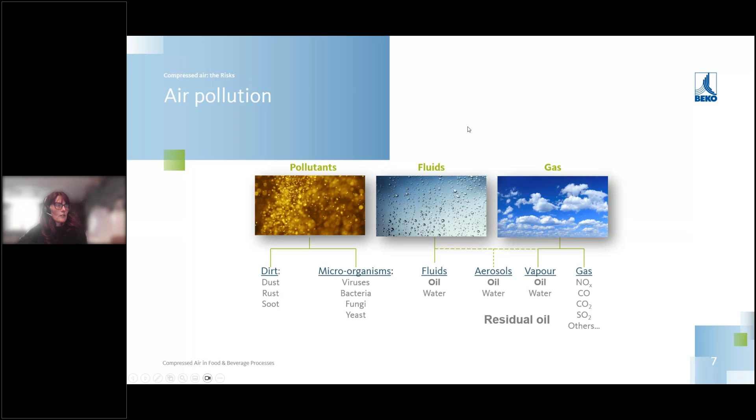So the film we have here just explains a little bit better what I just mentioned. If you take the air from a large space and compress it into a smaller space and then put it through pipework, that's basically what compressed air does. That's what a compressor does. It compresses, it reduces the volume, and pushes that airflow through a small pipe. So you can imagine that all the pollutants, moisture, oil, carbon dioxide, and any types of gases are also included in that compressed air stream.

Simply said, the quality of your environment air, the quality of the air on the intake side of the compressor, determines to a certain extent the quality of your compressed air. So it's a nice demonstration of what compressed air actually looks like in a simple diagram.

Before I was in compressed air, I never thought about it. It wasn't really interesting to me. I didn't know what a compressor looked like. And then when you see this image, you think, that's actually quite impressive. It's a great system, used everywhere. In most industries, there are very few that don't use compressed air. In some industries, it's less important for all these contaminants to be taken out, but in the food and beverage industry, it really is essential in an awful lot of processes. So just keep this image in mind when we think about what's in your pipework, in your compressed air.

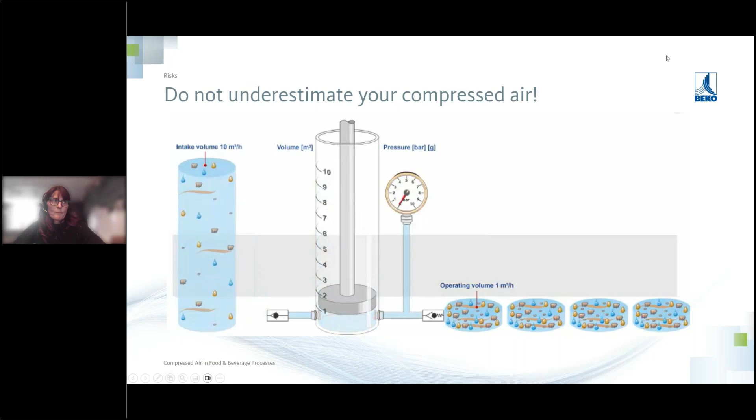Just think about that. So when we talk about the regulations and guidelines, if we're talking about dirt, moisture, filth, oil, who tells us or informs us what type of quality of air we're supposed to have? Who guides us and says you are only allowed to have a certain limit of moisture, a certain limit of microorganisms, oil, and dust particles?

There are a lot of certification companies out there, and in general, very little is said about compressed air. This is one of the things BEKO Technologies is working on, bringing awareness to not only these certification authorities, but places like Nemes Academy, where we can share our knowledge and think, hey, we need to share what we have, because the more we know, the better we can deal with things. The more we know, the more we measure, the better we can produce food products.

So the three particular ones I'll be talking about today are just three examples of where compressed air is mentioned, and that will be the BRC, the Food Safety System Certification (FSSC), and the IFS.

So what does the BRC say? I was just talking to Stefania just before this webinar started, and we were saying how little is actually mentioned about compressed air in all the certification programs. And I said, yes, it's true. There's only one item in the BRCGS, item 4.5.3, and all it says is: air and other gases used as an ingredient or that are in direct contact with products shall be monitored to ensure this does not represent a contamination risk.

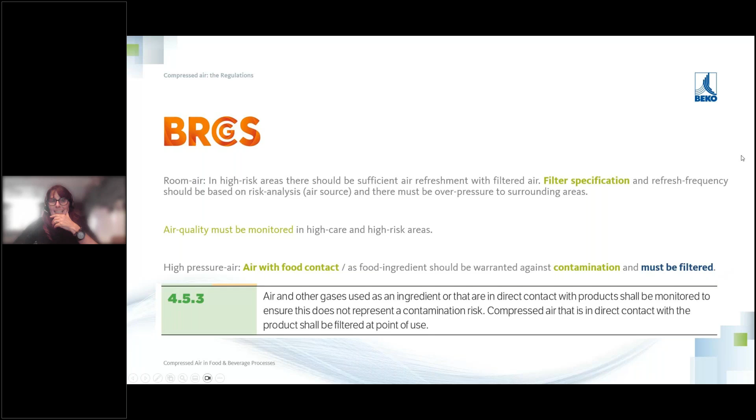And that actually comes a lot into the other certification programs that we talk about, the IFS. This is almost the exact same thing. The quality of compressed air that comes into direct contact with food or primary packaging material shall be monitored based on hazard analysis and assessment of associated risks. Compressed air shall not pose a risk of contamination. Again, very similar to the BRC, very similar in wording. Basically, compressed air should not form any risk of contamination and needs to be monitored.

Now, I don't know what monitoring means to you guys. Somebody might think, hey, I have a little person watching my compressed air installation all the time with his binoculars, with his glasses. He just sits down and watches the compressed air all day. He's monitoring the compressed air. It could be you have the high-tech measurement equipment, meaning that any type of variation or deviation in quality, you get an alarm bell on your fancy computers on your big screen. Monitoring is so broad, it's so open to interpretation.

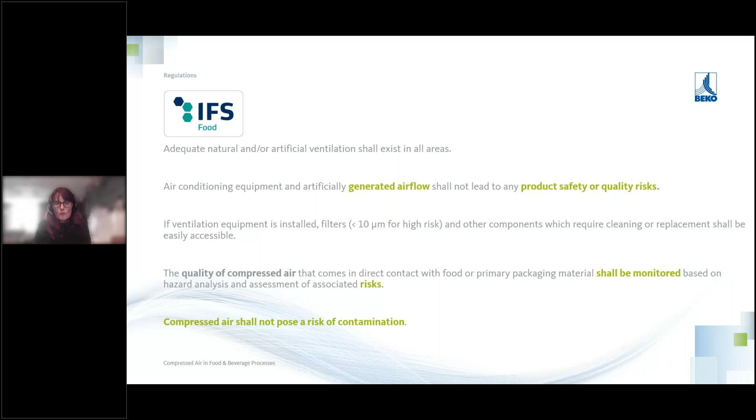So again, what does that mean for us? What does the FSSC say about it? Pretty much the same. Any compressed air used shall be constructed to prevent contamination, direct or incidental, of product, including transporting, blowing, or drying, shall be approved for food contact use, filtered to remove dust, oil, and water. So the FSSC actually uses similar words, but goes a little bit further, because the last sentence here says where oil is used for compressors, and there is a potential for the air to come into contact with the product, the oil used shall be food grade.

I'm just leaving a bit of silence there, because when I spoke last time on a webinar and I said, who here has ever got a jar of food grade oil from the compressor room and said, I think I'll have a drink? Nobody. So if that food grade oil in that jar is not an ideal drink for you to take on a Friday afternoon after you've had a hard day's work, why on earth would you think it's acceptable to spray, pour, or use it in your food product? It has less additives than mineral oils, but it still is oil that should not be used when a product comes into direct contact.

So yes, food grade oil can be better. It has lots of other factors as well. It doesn't clean the air as well as normal mineral oil does, because there are less additives. So oil is not only used for lubrication, but it's also used as a kind of filter. It takes out certain contaminants, certain particles from the compressed air stream. But food grade oil has less additives, so it has less of an absorbing capability for the contamination in compressed air. So food grade oil also, because there's less additives, doesn't last as long, so you need to replace it more often. It can be a bit of a degradation for your compressor, because it has to be changed more often, because it's less lubricating.

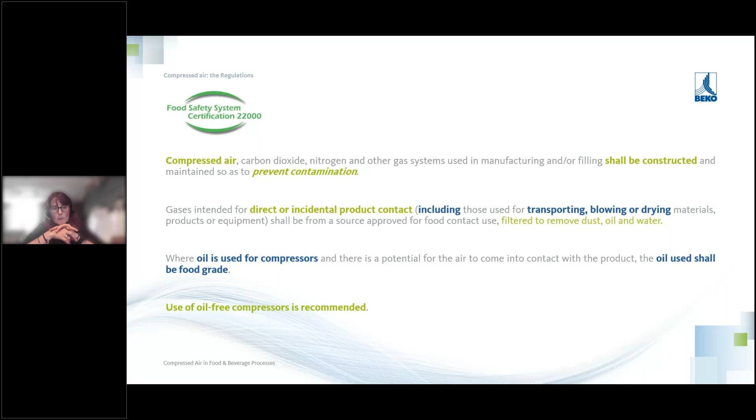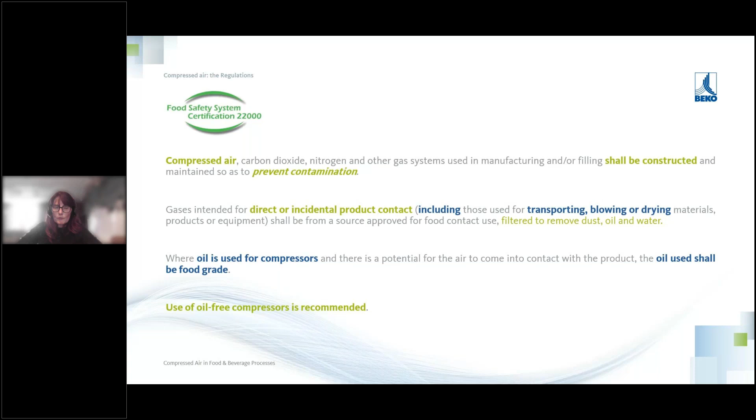So the three certification programs I've chosen, the BRC, the IFS, and the FSSC, all say pretty much the same: it shall be monitored, shall be filtered as close as possible to the point of use, and prevent contamination. The FSSC goes one step further and says food grade oil or an oil-free compressor. Just think about the limitations of those last two comments when you next go to the compressor room. So they all say it should be monitored, should be filtered, and may not pose the risk of contamination.

So the definitions: okay, so those vague guidelines that we have, how do we use those guidelines to define hard numbers that we can actually measure in order to classify our compressed air quality? Because if you look at your compressed air installation and it says it poses no risk of contamination, it's kind of guesswork, because you can't measure it or you haven't measured it.

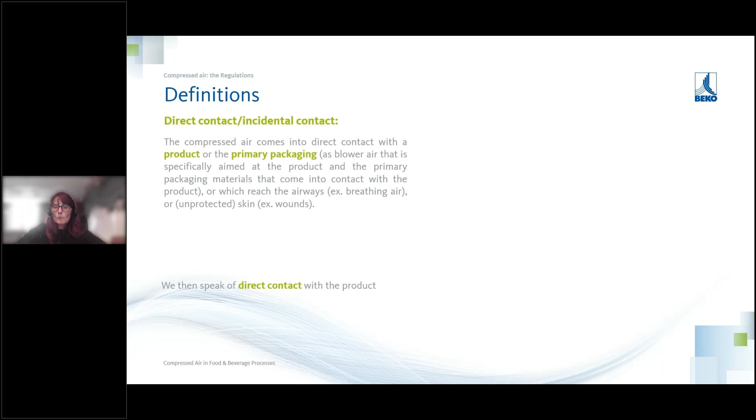It means that you've got to consider all the aspects within the process. So compressed air needs to be clean in order to preserve the shelf life, in order to keep the product safe for as long as possible without all the extra additives.

So there's less risk because the dilution means it's not as much of an impact with contact with the product. We talk about indirect contact with the product, and usually that comes from pneumatic components such as moving parts, vessels, cylinders, and that kind of thing.

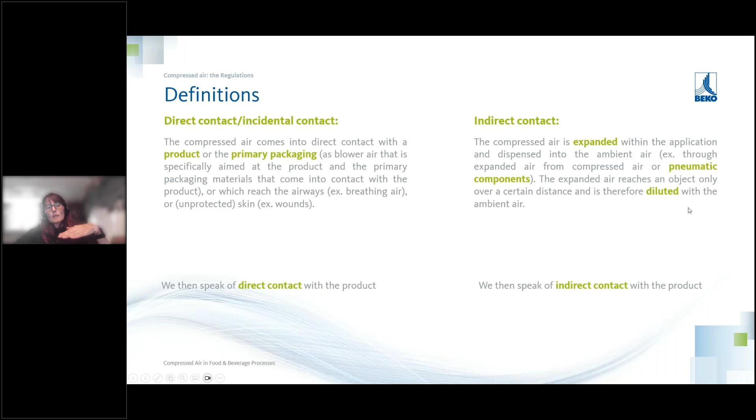So we have two definitions here: direct contact and indirect contact, and we need to determine in a particular process where my compressed air has direct contact with the product, and what quality that needs to be to ensure my product is kept safe.

Talking about numbers now, because I have a film in a couple of slides showing one piece of equipment that has direct contact and indirect contact. The VDMA has not only defined direct and indirect contact, they've also defined levels of contamination that are acceptable in order to put the quality of the compressed air into a class.

What is an acceptable level? You have different sized particles. I'll compare it with a football, a tennis ball, and a golf ball—just for visualization, since obviously we don't have footballs in compressed air. Just to make it more visible: football-sized particles, tennis ball-sized particles, and golf ball-sized particles. Different sizes mean different levels.

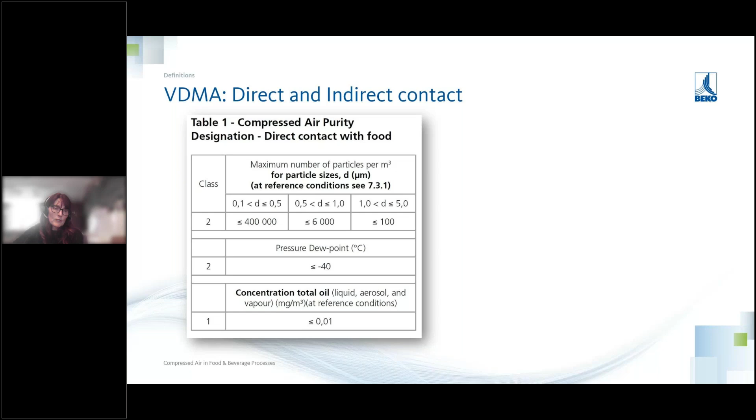If you're going to look for direct contact with your food product, then we advise class 221. When you talk about indirect contact, then you talk about slightly different classes. So the moisture is the thing that changes and the oil content changes. So the particle sizes don't change that much, they're pretty much still in the same class.

But the dew point for indirect contact, where we mentioned just before, that was with moving parts, that's with vessels, that's with cylinders that move back and forth. The pressure dew point does not need to be as low as minus 40. A pressure dew point can be plus 3, because in a working environment where cylinders are moving back and forth, usually the temperature stays at about that temperature. It very rarely drops underneath 3 degrees, meaning that the moisture in the compressed air will stay moist and will not condensate until the temperature decreases.

And especially for moving parts, oil is also sometimes a little bit okay to have, to provide a bit of lubrication so that the cylinder can continue moving. So direct contact and indirect contact are slightly different.

Again, it depends on your specifications as a producer. It depends on what the manufacturer actually needs for his process. But this is the guideline that is now being translated. So guidelines from 'must be monitored', 'shall be filtered', and 'must not form any risk of contamination' - we can translate them into these numbers, and that's something that is measurable.

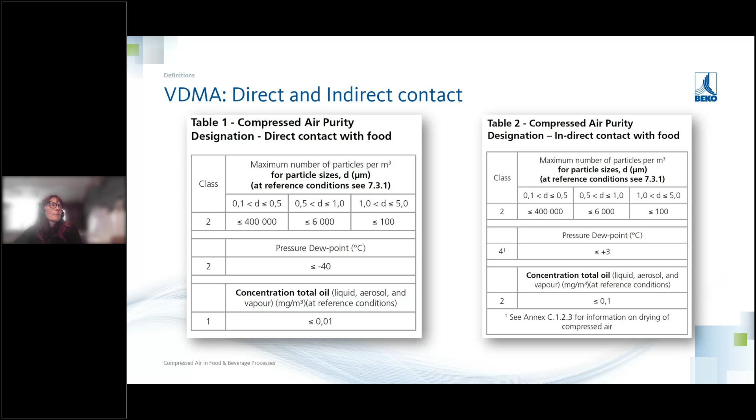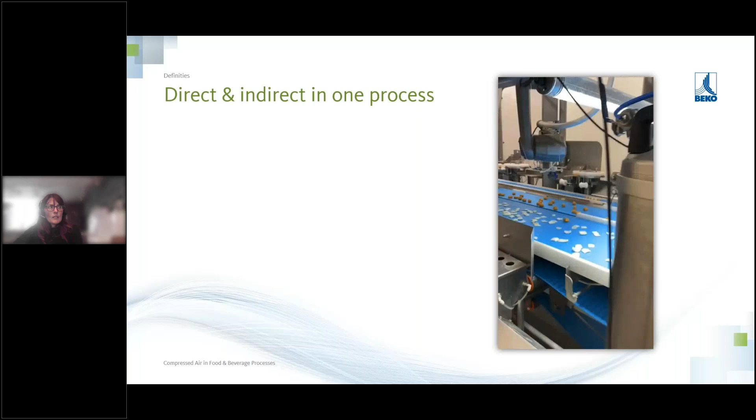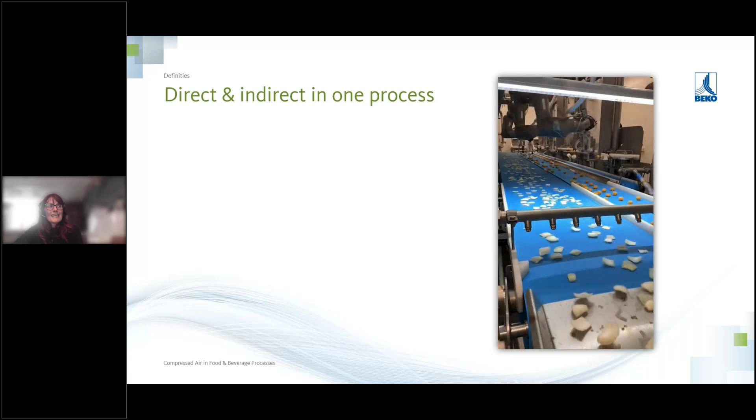So here's an example in this film of a piece of equipment, one machine, which is making cookies, and they have different processes within one machine. Now you can see here nozzles blowing compressed air over the product, separating them, splitting them, dividing them - that's direct contact. And here you see moving parts, cylinders, all the blue cables - it's usually compressed air. Sometimes companies have a different color, but usually a blue cable indicates a compressed air line. When you look at the robot arms moving, compressed air is being used to move cylinders, to create movement. And when compressed air is inside a cylinder, it escapes, so you have indirect contact.

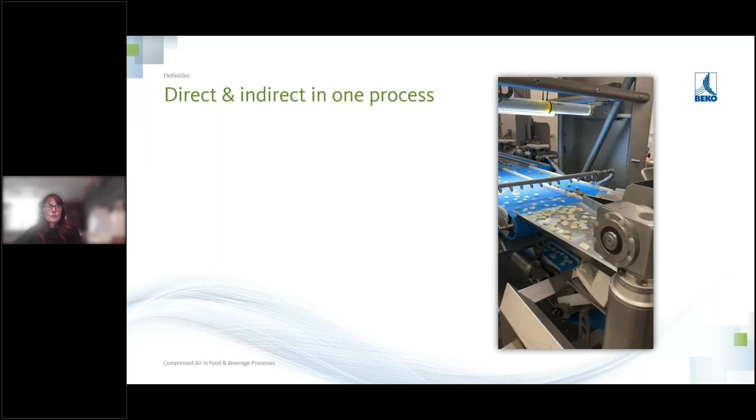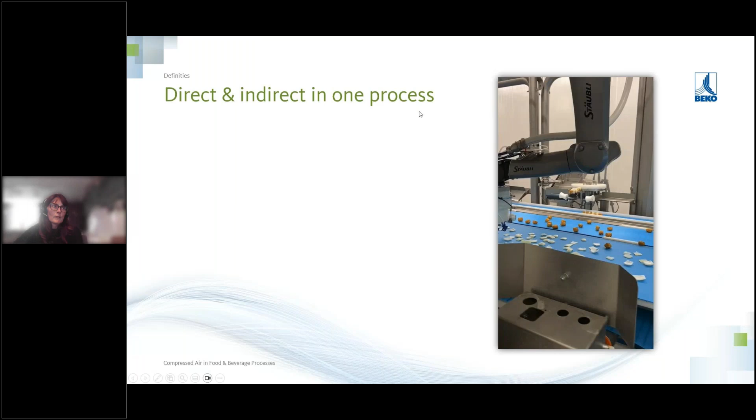So when we talk about, for this piece of equipment in particular, the quality that we would like to have would have to be the highest because that's where the most risk is. If we accepted a 242 class, meaning there's still moisture in there, this compressed air nozzle would be blowing moist air over these dry cookies. And these dry cookies would pretty much like to take on some moisture and become soggy cookies. And nobody likes a soggy cookie. Unless you dunk it in your tea like I do.

So just to get a bit of a close-up here, the nozzles on the left-hand side of the screen, they blow compressed air directly into, onto, or through a product. Sometimes compressed air nozzles are used to clean molds where you put melted chocolate. Sometimes it's used to clean a transporting rack. Sometimes compressed air is actually used to blow away products that are not according to specification. So you have 20 nuts and one of them is the wrong size, wrong shape, wrong color - compressed air is sent through the system and it blows out that one nut or peanut that is not up to specification. So it's direct contact with the product, usually where you can see a nozzle blowing directly onto the food product.

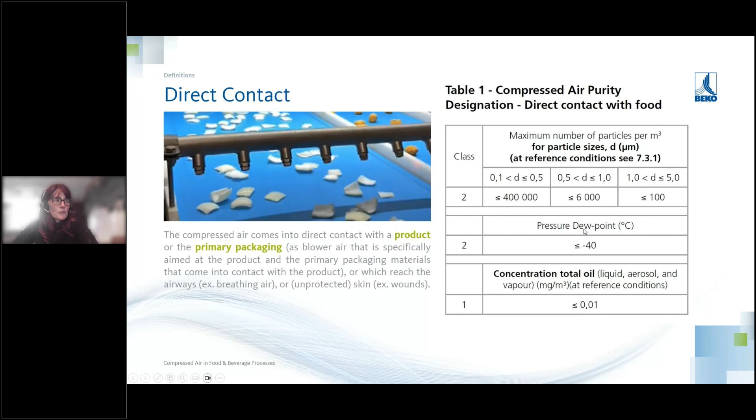So again, bringing the table back into view here, the quality class that we would like to see for this particular part of the process would be quality class 221. Particles, class 2, moisture, class 2, and oil concentration, class 1.

When we go to the next picture, it's indirect contact - the robot arms. You can see here the pipe work from the compressed air. This is indirect contact, so the compressed air will escape from the cylinders. You sometimes hear the movement, which means compressed air is escaping and being diluted into the environment. So the scheme next to it, the sheet, is class 242 for indirect contact.

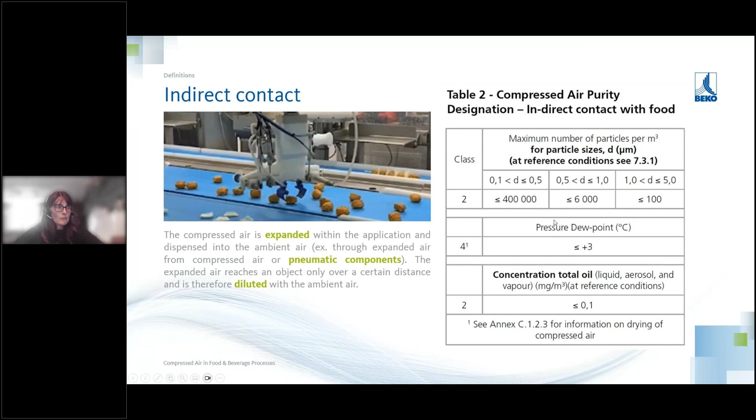So when we look at it as an overview, just to give you an idea of the actual ISO 8573 class, this is what it looks like. It's something that has been developed by the British Compressed Air Society and ISO together, purely to give some definitions to direct contact and indirect contact.

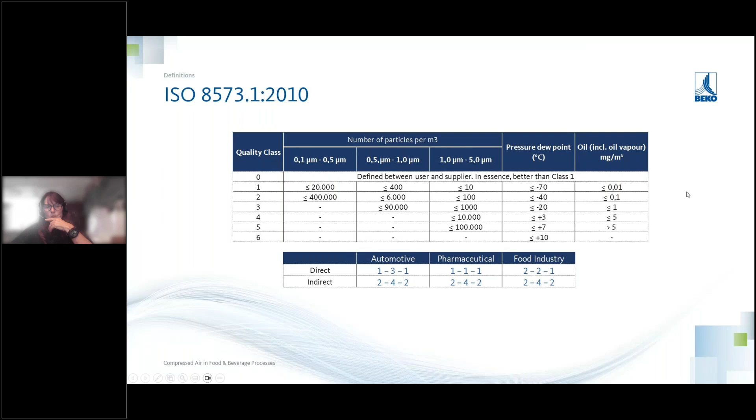So when we look at this overview here, for direct contact we had class 221. You can see with the green line around here, the first three columns are the particle size - the football, the tennis ball, the golf ball, the three sizes. The fourth column, the pressure dew point, that's the -40, also class 2. And then class 1 for oil vapor is class 1, 0.01.

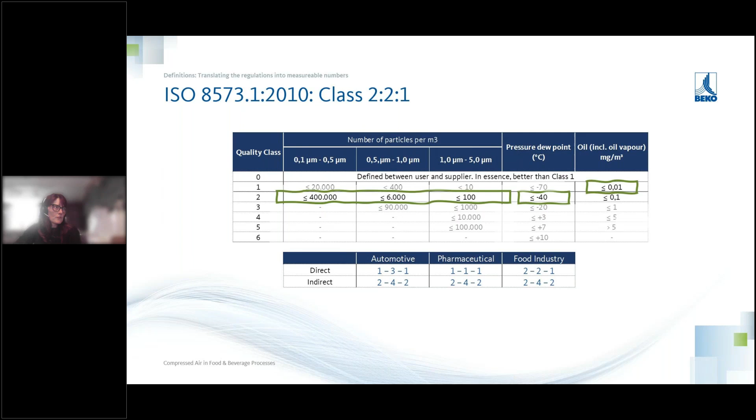Just underneath, a bit of an indication as to the requirements in different industries. The automotive industry for paintwork - oil and moisture is really not done for paintwork. You will get an awful effect, like peeling, bubbles in the paintwork. Costs a lot of money to redo a car spray paint.

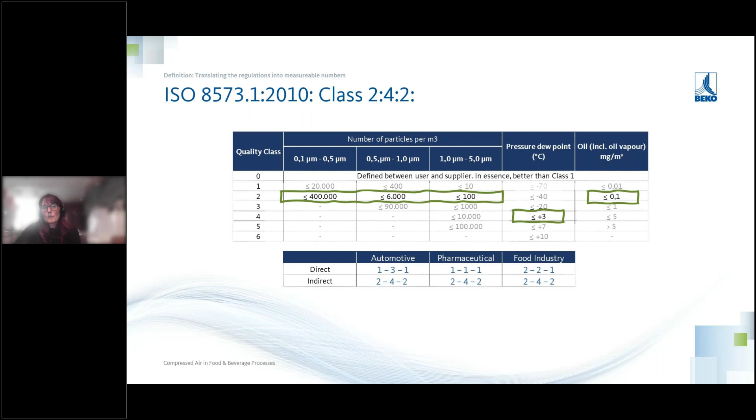Pharmaceutical industry has to have class 111. They really are very secure in anything that uses compressed air - they monitor and measure it so much better. And the food industry, 221. Again, it will depend on the product we're talking about. If it's a product that takes on moisture, if it's hygroscopic, it will absorb moisture - not a good thing. If it doesn't absorb moisture, then moisture will be less of a problem. So again, it depends on every product. But these guidelines do help create a bit of awareness on where we're going to go with this.

So when we look at the process, it's not just the manufacture of the product. Here we're looking at the end product - the meat, the cheese, the bread, the ice cream, or the milk - and we're looking at the process here in the machine. You see a CCP, a critical control point or a control point, depending on the process - it might not be a critical control point. What happens from the start is this is the intake air on the left-hand side. You see moisture, trees, cars, exhaust, industrial air. Anything in the air gets taken into the compressor.

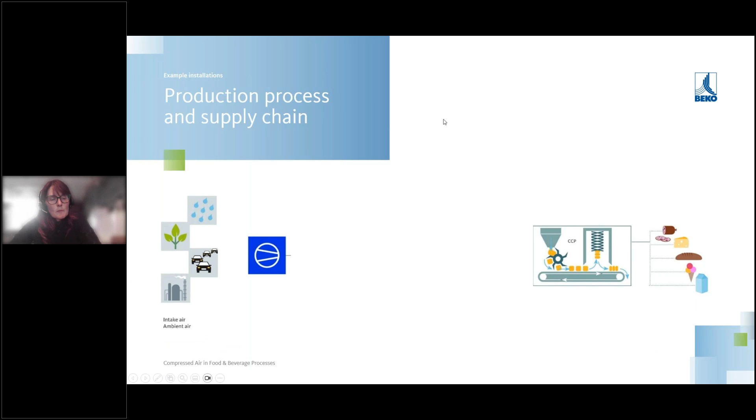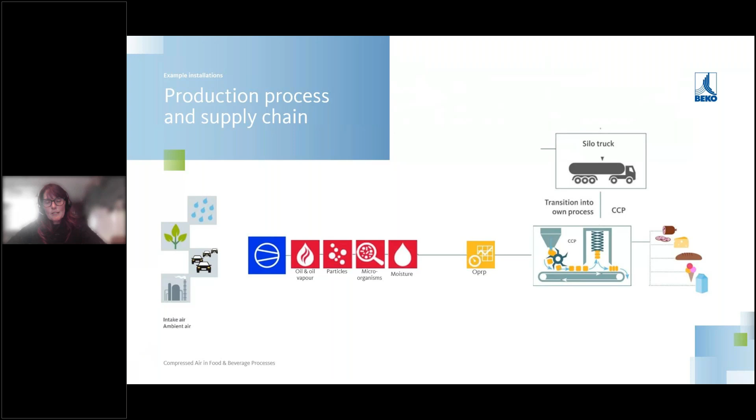The compressor then makes it into a smaller bundle of mass, and then the oil, the particles, the microorganisms, moisture are all collected together. And just before it reaches the CCP, just before it reaches the manufacturing part of the product where it comes into direct contact, is something that needs to be taken into consideration. So the OPRP, the operational prerequisite program, it's something that needs to be mentioned when you talk compressed air - it needs to be mentioned because it can be a risk. So take into consideration that it might not be a huge risk, it might not be a critical risk, but it's something that is part of the production process.

Now, providing the manufacture of the bakery or the breads, whatever, you have a silo truck - a truck that's transporting sugar, milk, powders, whatever. What happens with the transport that he is bringing, the raw materials and the packaging? How did it all get into the truck? There's obviously a compressor there because in the silo truck, you need to have some compressed air pumped in to get the powder out of the silo truck. So think about that in the production chain.

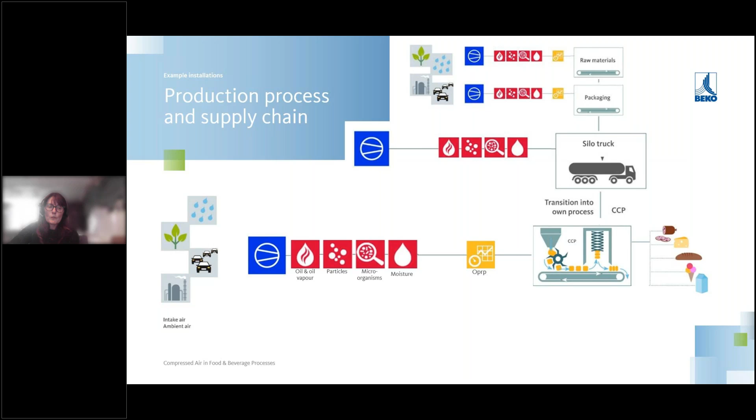Does the manufacturer know how his suppliers use compressed air? Do they monitor the compressed air as well? Because that can still have an impact on his product, whether he has it all beautifully written into his OPRP, but maybe his supplier, maybe his transporter doesn't. So it's something he needs to address and say, hey, I need you to look at the compressed air and provide me with proof that you are monitoring it, that you're keeping the values as low as possible, because I need to keep my product safe.

Now I'll just go through these installations briefly because we have about another 10 minutes. I don't want to go into the installations too much. A typical installation, you find a gray compressor, blue compressor, yellow compressor, it doesn't matter. It's an oil lubricated compressor. You see a vessel where the air is stored. Now, if the vessel does not have an automatic drain under it, moisture can build up inside the vessel.

And that ends up as a nice foundation for microorganisms for growth. A nice warm environment, a lot of moisture, and that can also be transferred through to the filter, which is number 3, and then through to a fridge dryer. Now, the fridge dryer provides a dew point of 3 degrees, which means for indirect contact, this can be a perfectly suitable solution.

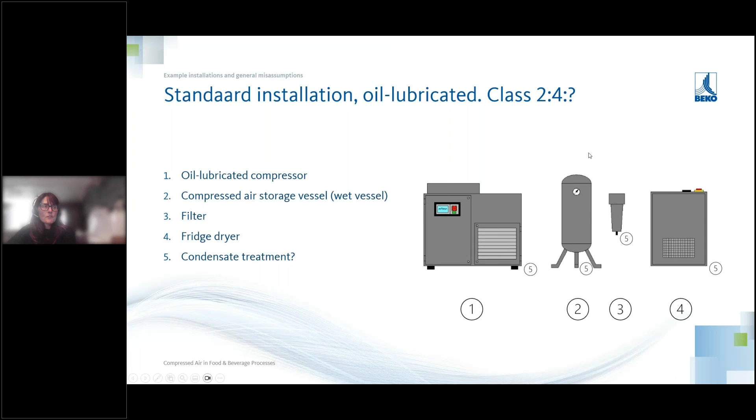The first thing we need to take into consideration is where are the drains to remove all the moisture from the compressed air. And that's something every compressor has inside, but it's not always an automatic drain. It's not always a drain that drains when there is moisture. Sometimes it's a time valve, sometimes it's a manual valve just to release water. So a standard installation for a class 2:4, possibly, potentially.

What's the condensate treatment look like? Another installation similar, but slightly different in installments. So you have the compressor, the filter, the dryer, and then the vessel. And the vessel is then what we call a dry vessel. So the moisture has been removed by the fridge dryer, number 3, and now there's dry air inside the vessel. Again, moisture can still happen if the temperature reduces underneath the temperature that the compressed air has been dried to, which is the fridge dryer, 3 degrees.

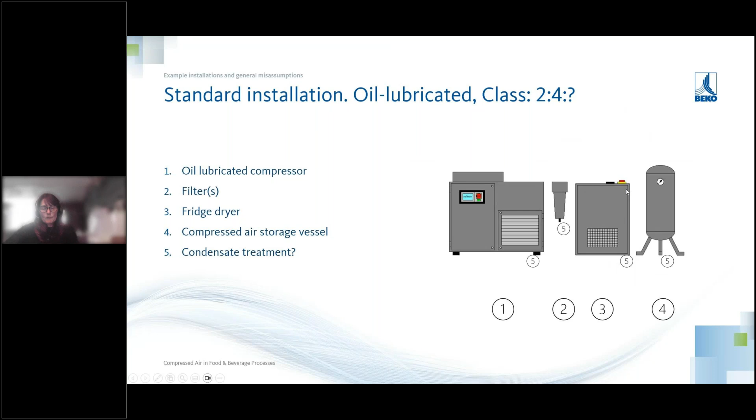If your fridge dryer doesn't work, then you can end up with 5, 6, 7, maybe even 12 degrees. And the moisture in compressed air increases exponentially. So with 3 degree compressed air, you have 6 grams of water per cube. When you go up to 25, 30, with 35 degrees, you have 39.95 grams. So it's an exponential increase. The warmer the air, the more water it can contain.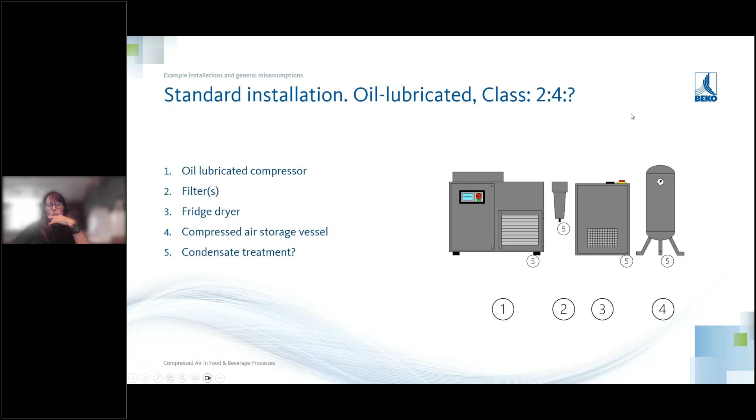So again, moisture is always going to be the first thing you can look at. That's the first initial treatment you can give your compressed air installation: a condensate drain that removes the condensate, the actual fluid water, from the system, but without loss of compressed air, because compressed air is an expensive medium. And if we lose compressed air, we're basically just burning our money.

So the next installation is a similar one. It could be an oil-free compressor. So you have here an oil-free compressor. And as I mentioned previously, oil kind of washes the air, so it takes up certain contaminants. But you still need to have a class 1:2:1. You still need to have treatment because intake air can contain hydrocarbons.

For the water-injected compressors that I mentioned previously, the water quality also determines the quality. If that water is, for example, a stupid example, if it's sucked from the river to cool the compressor, you're going to have the river water quality. Now, that's never going to happen, but it's just to give you an example. What is the quality of the water used for cooling and used for keeping the system closed so there's no backwash of air?

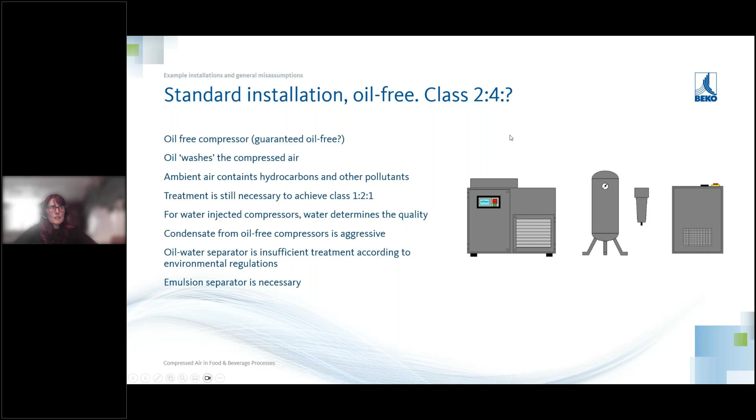And you need to think about what happens to the condensate that comes from an oil-free compressor. The condensate there is generally quite aggressive and cannot just be removed by an oil-water separator. So that's something I can always go into more detail on, but right now it's not the big issue because that's treatment after the condensate has been removed, and we're talking more about the actual compressed air and not so much the condensate from the compressed air.

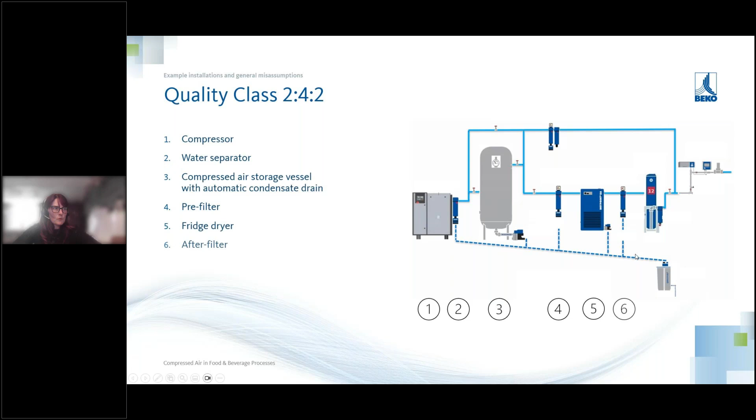Another installation example, because obviously that's what we like to do. We'll have a compressor with a water separator, and you can see the blue dotted lines. The blue dotted lines show where condensate can happen and where it's removed and then is treated by an oil water separator.

So once you've removed all the moisture from the system, you have less moisture in your compressed air. So we go from the compressor to the water separator, to the vessel, to a pre-filter, to a fridge dryer, to an after filter, and then to an activated carbon. Activated carbon is used regularly to remove hydrocarbons from compressed air streams, so oil removal, and afterwards a measurement system just to prove the quality of the compressed air. Simple installation, often used with activated carbon.

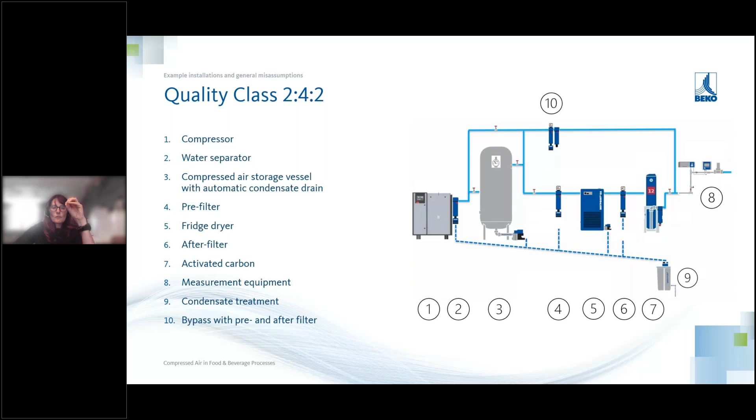Now, activated carbon has also its limitations because activated carbon captures oil and oil vapor. But if there's moisture in the compressed air, it will also take in moisture, so then there'll be less capacity to take in the oil. So you'll still end up with oil after your activated carbon. Another limitation of activated carbon is temperature. If there's an increase in temperature, the captured oil can then evaporate and still travel through the stream. So activated carbon, even though it's often used to remove oil and oil vapor from a system, has its limitations. You have to be aware that moisture and heat have an impact on how it will capture the oil in a compressed air treatment.

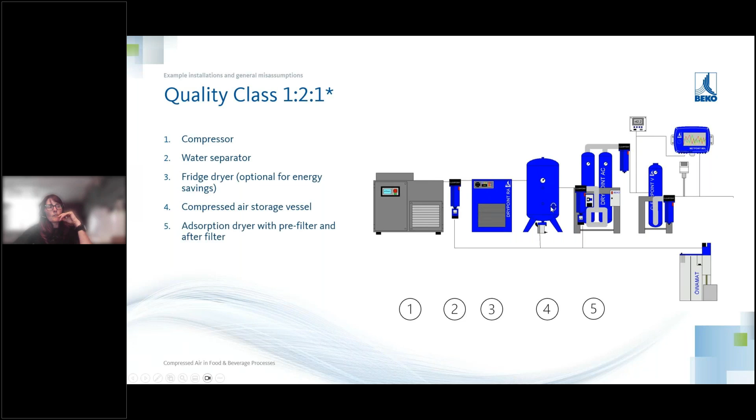Ideally, if I'm right, this is the correct picture. Quality class 1, 2, 1. We have a compressor, we have a water separator, we have a fridge dryer, and then a vessel. Then we have an absorption dryer with - I'm trying to think of the English word again, I apologize - with beads inside that capture water and then release it again. So it's an adsorption dryer, not an absorption, it's adsorption.

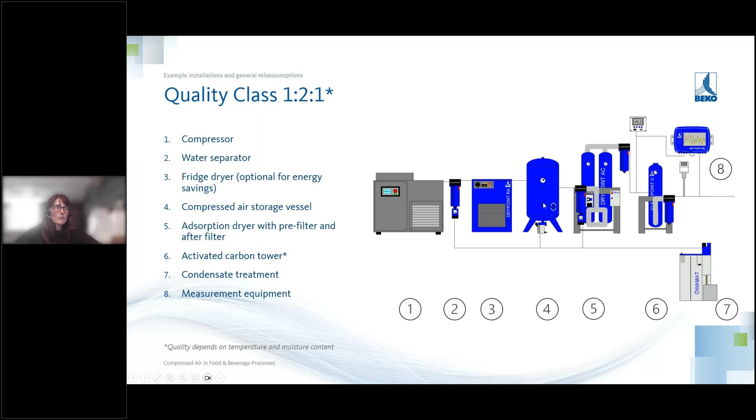It removes moisture from the compressed air in one vessel while the second vessel is then being regenerated. So it kind of switches towers, it switches columns to dry and regenerate the compressed air. It takes in moisture and then gives the moisture back out and removes it from the compressed air stream. Then we have a small activated carbon tower, just again to remove oil vapor, and then measurement technology afterwards. And the black lines coming down from every piece of equipment underneath the first separator, underneath the vessel, that is oil condensate, which is then treated by an oil water separator.

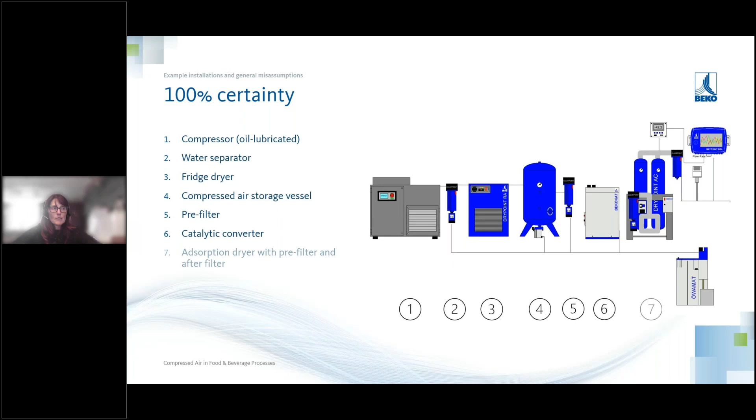The activated carbon is, again, I did mention, limited in its use. If you want to be absolutely 100% sure of oil-free and bacteria-free compressed air, the only way to go is a catalytic converter. A catalytic converter uses a catalytic material in combination with heat to break down the hydrocarbon chains into CO2 and H2O, and that's the certified method to remove oil and bacteria from a compressed air stream.

So: compressor, water separator, fridge dryer, storage vessel, pre-filter, catalytic converter, adsorption dryer, because as I just mentioned, the BEKOKAT breaks down the hydrocarbon chain into water and CO2. So with a dryer afterwards, we remove the extra moisture from the compressed air stream. Then we have a dust filter and measurement technology again.

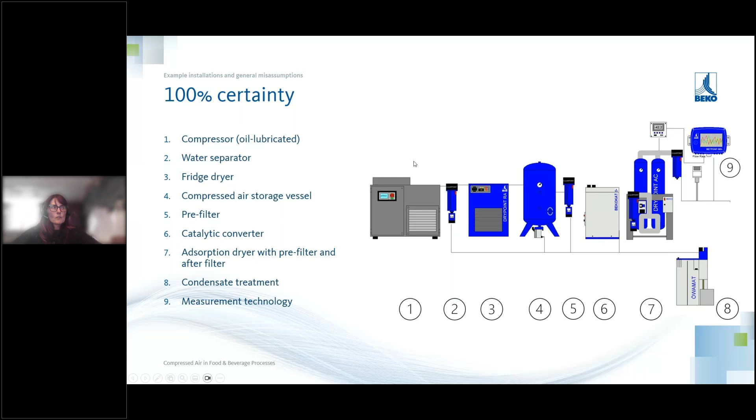And this measurement technology is basically what we think you can use to monitor your compressed air professionally, exactly and efficiently. Because if you don't measure the quality of your compressed air and you don't know what the quality is, you're basically looking into a crystal ball. If you've never had any problems, you've always done it this way, nobody's ever complained, you've never had anybody sick - yes, we can all say that when we don't know what we're looking at.

So you have to think about measuring and monitoring to meet the guidelines. We measure everything these days. We measure the pressure in our tires. We measure the petrol in our tank. We measure the electricity that we use. We measure the water that we use. We measure every step we take just to see if we're getting our steps in every day.

But with compressed air, we kind of think, hey, I have a good installation, it's fine. It's maintained every year, it's fine. But if you're not measuring it, you really don't know. Sometimes you're quite surprised - the technical specifications can say they give you the quality you need on paper, but when you actually measure, it turns into something different, something you weren't quite expecting. And the whole time you've been thinking, I have a great installation, it's well maintained, it's brand new, but I still have the wrong quality at the end of the pipe work. How did that happen?

It's possible, I've seen it happen. And it's surprising that it happens all the time, because pipe work has a big impact on it.

So the compressed air treatment we have to take into consideration: look at the compressor room. Where is the intake air? Where is the compressor sucking air from? Is it a chemical area, a rural area, the middle of the countryside, or the middle of an industrial estate? What air are you taking into the compressor room, meaning what air is the compressor sucking in?

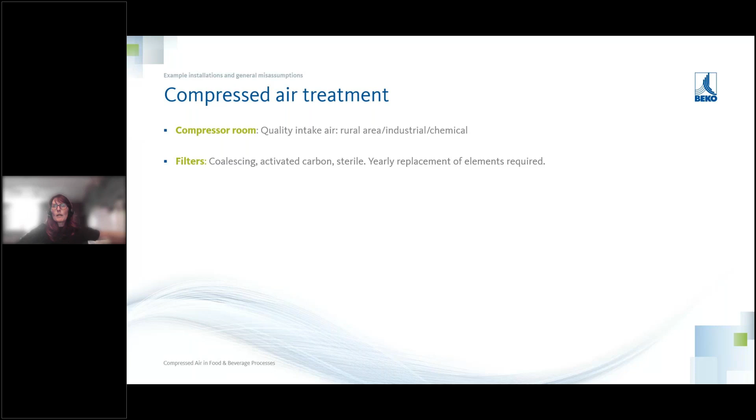You need to replace these elements at least once a year, and sometimes more often. Think about that, it's not just yearly. If I drive my car 1,000 kilometers every day, it's going to need more maintenance than somebody whose car is just left there for three weeks doing nothing. So it's use, it's the location, it's what is the intake air.

What type of dryer do you have? We only briefly talked about a fridge dryer and an adsorption dryer. There are different types of dryers which give different quality class requirements. Do you have the right type of dryer? If you do, is it functioning correctly? Does it need maintenance, does it need regular replacement?

Does it need maintenance done yearly, monthly, weekly? People tend to think once a year is fine, but maybe twice a year might be better, just to keep the quality class at the same level as it's always been and what's required.

Condensate treatment - what type of condensate drain do you have? Is it an automatic drain that is level controlled? Is it a manual drain, which is basically just a tap underneath a vessel? And if you forget to open that tap, you'll have a vessel flooded with water instead of compressed air. You won't have enough air for your installation, and you'll just have a lot of moisture there.

So you open the tap and buckets and buckets of water can flood out. I had that one time with a customer - he had a vessel and said, I don't seem to have as much air available. I said, check your vessel. He opened the tap underneath, and twelve buckets of water later, he said, I think it's empty now. So yeah, it's a little thing, and it was amusing.

But when you think about the waste that is, if you just put a simple automatic, level-controlled condensate drain, it is so much more efficient and effective. What do you do with the condensate once you've removed it? Do you use an oil water separator? Do you have your own water treatment system? Or do you need something specific to make sure it meets environmental regulations?

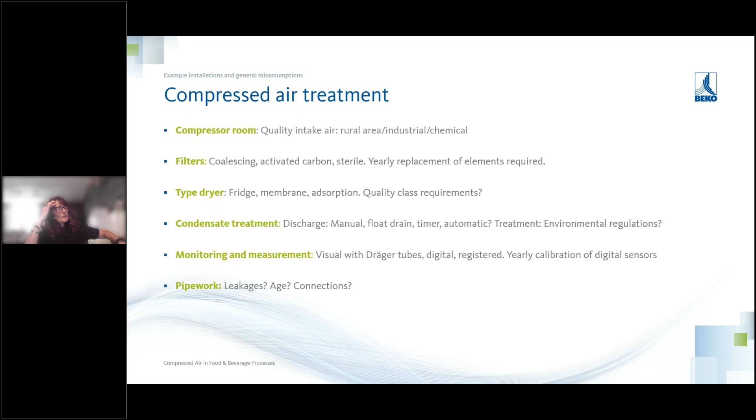Pipe work - oh, I have so many customers who I ask, have you checked for leakages in your pipe work? Good grief, don't get me started. I would not even like to think about measuring the leakages in my pipe work.

Some customers actually install a second compressor just to compensate for leakages in the pipework. That's such a waste of time, such an energy loss, because energy costs money and we're trying to reduce energy. So when your compressor is running extra hours to compensate for leakages, you're also creating CO2.

It's a simple thing, yes, an awful thing to have to do, checking your pipework for leakages, checking for ball valves which are oil lubricated when you're supposed to have an oil-free system. If a connection isn't connected correctly, there's so much in the pipework that can improve the quality of your compressor, believe me.

And what certifications do you follow? We've shown the three: the BRC, the IFS, and the FSSC. How do you prove to the auditor, who is becoming more and more aware of compressors because we're training them to look at the compressor installation? Do they accept you saying my system was installed 5 years ago and I've had it maintained every year? Do they accept that the technical specifications are the actual specifications? Do you have a high quality compressor class according to the requirements for your product?

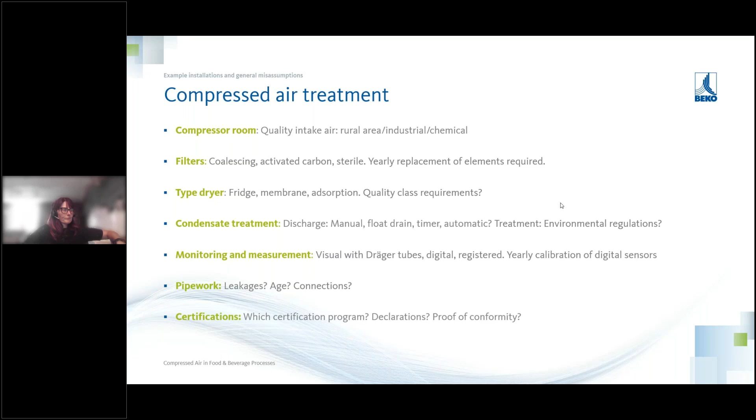So starting from, where do you start? If you look at your compressor installation, the compressor, the filters and the dryers, and you think, I don't know what quality I have according to the specifications the manufacturer tells me, I have class 2:4:2. I have a good quality class suitable for my product.

Check it. Do an air quality audit. Get some digital measurement in. Measure the moisture, the particles, and the oil, and then you have a benchmark. Then you have a starting point from which you can improve if necessary.

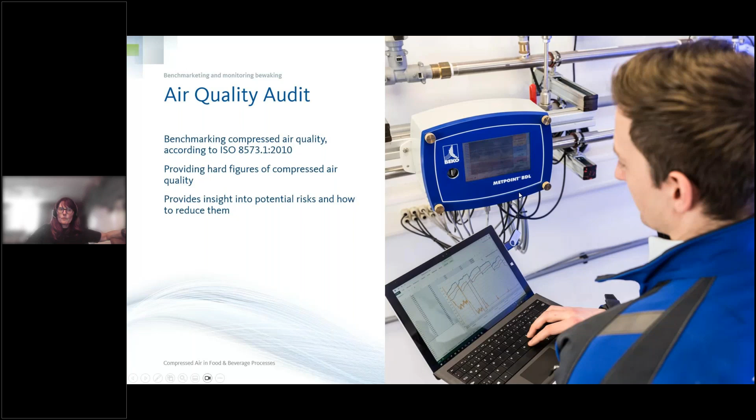So it provides insight into the risks you may have. If you have a fridge dryer that's not working, you have a lot of moisture you did not know about, and you need to improve on it. It's basically your starting point. Where do you go from there with improving your compressor system?

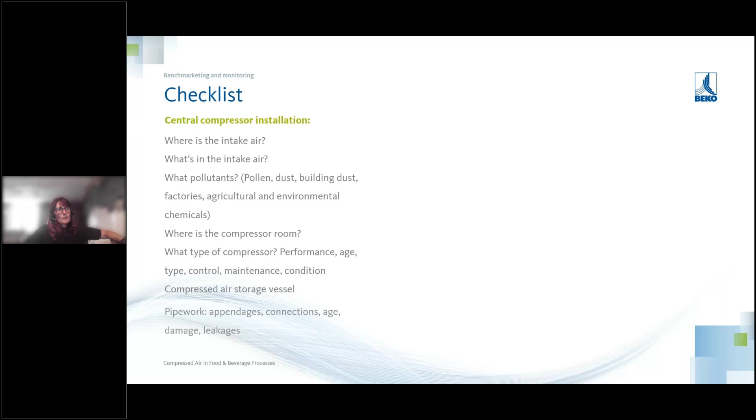So this is the checklist I was talking about, questions you can ask yourself when you go into the compressor room. If you have somebody walking through there and he says, let me have a look and see what we need to check, you'll see: what's the compressor installation, what does it look like, what treatment do I have, do I have proof of the quality of it, do I have certification, do I have maintenance schedules, do I have maintenance proof?

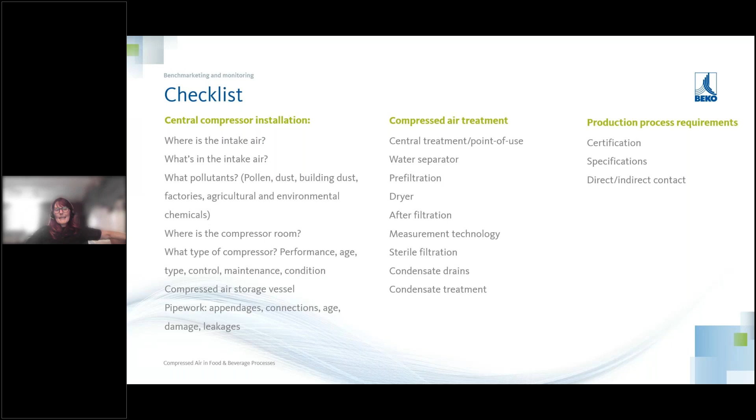Just this checklist is something you can take with you and think, okay, I don't know where the air intake comes from. Does it come from the left side of the building, from the north side? Maybe it might be better to move the intake to the other side of the building where the wind doesn't blow from the chemical industry, from CO2, from printers, from the nut factory. Anything can impact your product, and sometimes it's just the simplest thing—the wind direction from which the air intake is coming.

So rounding off, and I think I'm still in time, the checklist is also on the homepage of BEKO. We have an e-learning program just to get you familiar with compressed air. We also have lots of webinars available, and some videos. We're also very happy to provide training on the job.